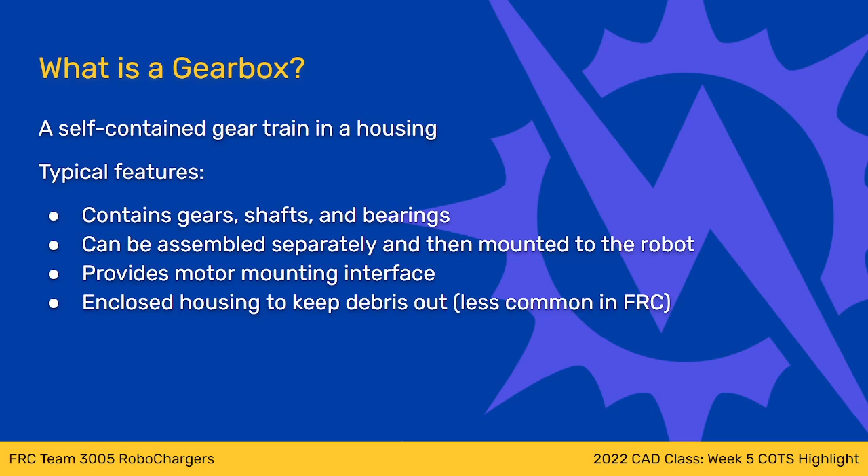So that's what a gearbox is in general. Now we're going to talk about a specific type of gearbox, called a planetary gearbox.

A planetary gearbox operates using what are called epicyclic gear trains. Hopefully I'm pronouncing that correctly - don't think I've ever said that word out loud in my entire life. Most of the time we just call it a planetary gear set or planetary gear train, but epicyclic is the technical term for it.

Basically, it is a system of spur gears - you can see this image on the right side of the screen - that are rotating inside of a ring gear, or an internal spur gear.

We talked last time about different types of gears. We talked about ring gears. We talked about spur gears.

A planetary gear set is kind of a combination of a couple different types: the internal spur gear and a normal spur gear, or external spur gear, if you like. They're arranged like this, so there are a few key components. First, the outside, the internal gear, is just called the ring gear. The sun gear is this gear here in the center, and then the planet gears are these gears around the outside.

There can be different numbers of planets. There are 4 in this screenshot that I grabbed. This is of a planetary gearbox used in FRC. I just grabbed a screenshot of a CAD model to show you what it looks like.

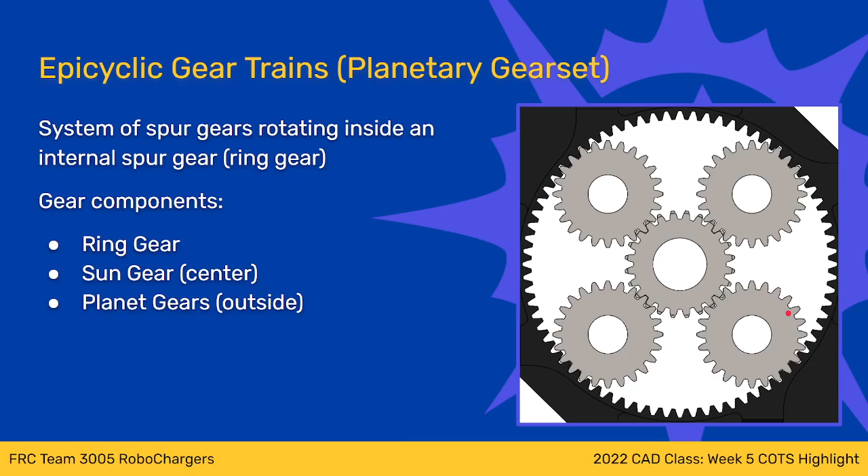As the sun gear rotates, the planets kind of roll around the outside. As the sun gear spins, the planets just migrate around in a circle, and that's why they're called planets, right? Because they kind of orbit the sun. It looks like a solar system, right? So that's why it's called that.

Okay, so let's talk a little bit more about a typical planetary gear train. Planetary gear trains, or epicyclic gear trains, are actually somewhat complicated in terms of how they can be used. There's a lot of different ways to use them.

Epicyclic gear trains can actually be used as a differential, which is a special kind of mechanical device that I don't really even want to get into. There are a lot of different ways to use them that you don't ever see inside of FRC. There's really only one arrangement that's used in FRC, so I'm going to describe that here, because that is the only way they're used in FRC, and it is the most common way they are used in general.

But there are other arrangements. So if you want to do your own looking into planetary gear sets, if you come across some weird example where it's not clear which gear is driven by the motor and which one is spinning, and you come across a different arrangement, just understand that's still probably a planetary gear set you're seeing — it's just being used differently.

So the sun gear is driven by a motor, or it's driven by a previous gear stage — I'll get to that in a second. But the sun gear is what is driven. So you've got some sort of shaft or torque transfer interface that's spinning the sun gear.

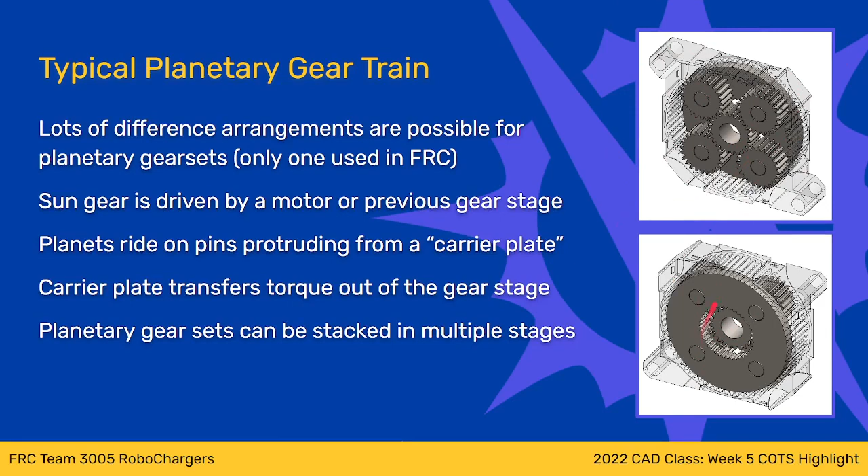The other thing is because the whole gearbox is kind of axial, I'm driving the sun gear, which is in the middle, and then I have the carrier plate. There's a spline in the carrier plate, and that's how I'm getting torque out, with something that sockets into this spline. But this carrier plate is rotating around the same axis as the sun gear. So as long as I have the proper splines and shafts to interface, I can take one planetary gear set and stack another one right on the end, have the carrier plate drive the sun gear of the next stage, and stack these reductions to create multiple stage gearboxes in this really crazy compact and easy to manage form factor.

On top of all the other advantages, the fact that you can just stack these stages end to end to end and keep going means you can create crazy high reductions if you want to, just by stacking these stages on the end. That has some very specific advantages when it comes to FRC and FTC, and I'll go into those later.

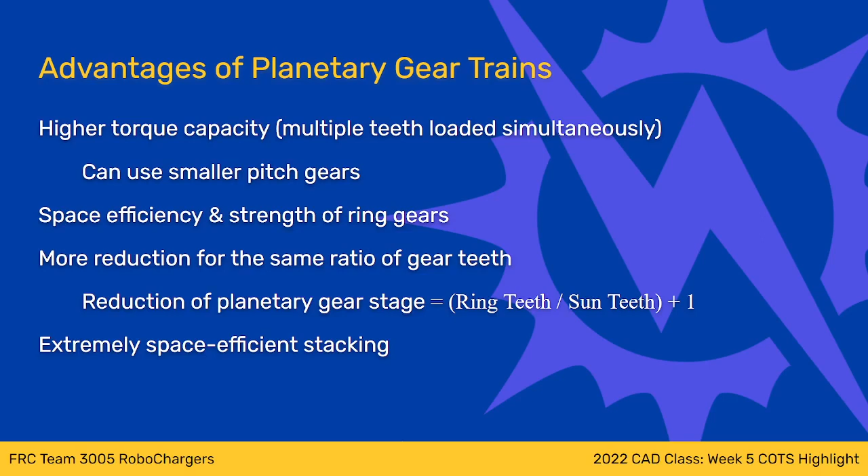Okay, so a quick summary on planetary gearboxes. They're very high performance, they're very small, and because they're small and very efficient in terms of gear strength, they're also very light. They're extremely ubiquitous inside of FRC and FTC because, in the case of FRC, weight is extremely important and space is important. FTC weight is not quite as big of a concern, but space is definitely a concern in FTC because the robot's really small.

The only disadvantage planetary gear sets have is that they are complex, which means they can be more expensive. So you're not going to see planetary gear sets on cheap items like appliances or toys or things like that, because the performance usually isn't worth the cost.

You will, however, see tons of planetary gearboxes in industrial applications. A lot of cars have planetary elements inside of the transmission, and you'll see them in robotics, obviously in FRC and FTC, but also in other robotic applications as well. So planetary gear sets just have a lot of advantages at the relatively small cost of some complexity. That's kind of an overview there.

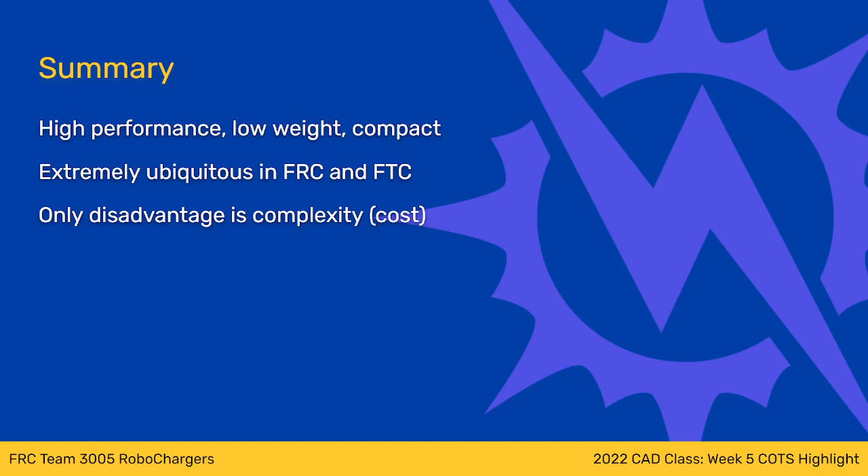Now that we've talked about planetaries conceptually, let's talk about some actual specific ones. We're talking about ones that are off the shelf, and I'm focusing on ones marketed towards FRC and FTC. Since planetary gearboxes are super ubiquitous, for a lot of applications you can go buy industrial ones, hobbyist ones, whatever - I'm not going to cover those. I'm just covering the ones targeted at FRC and FTC markets.

Okay, so let's start here. I'm going to cover some ones off the bat that are less common, and then towards the end I'll hit some of the ones that are a little bit more important for you guys to know.

There's a few different companies that make these. I know I haven't really addressed the whole supplier thing, so I'm going to throw out some names. I understand if you guys are new you might not know who these companies are, but I'll just briefly explain who they are and move on. In the previous iteration of this CAD class I had a bit more on introducing the companies we commonly buy from, but I'm just going to overview these a little bit. I also mentioned there's some regional stuff - depending if you're on the Robochargers, we use certain suppliers, and if you're watching this video from a team in a different part of the country or world, you may use stuff from a different supplier.

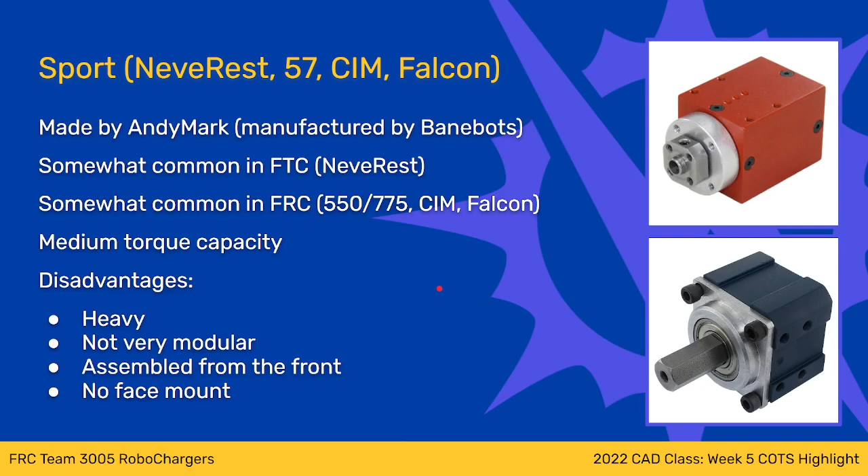This gearbox came out for the 2013 season, so it's been around for a while. BaneBots has had gearboxes around longer than that, but they've actually gone through at least one product reset where they discontinued all their gearboxes and came out with a new version. The BaneBots gearboxes that were out when the VersaPlanetary was launched were slightly different, but still kind of the same concept and a lot of the same disadvantages.

So BaneBots gearboxes were pretty common, reasonably common I would say, before the VersaPlanetary came out. And then when the VersaPlanetary came out, it just took over because it was so much of a better product that everybody switched overnight.

2013 was my junior year as a student, so I had done 2 years of FRC before the VersaPlanetary came out, and then my junior and senior year we used the VersaPlanetary, and it's just like night and day. It was so much easier to use than the products that existed before.

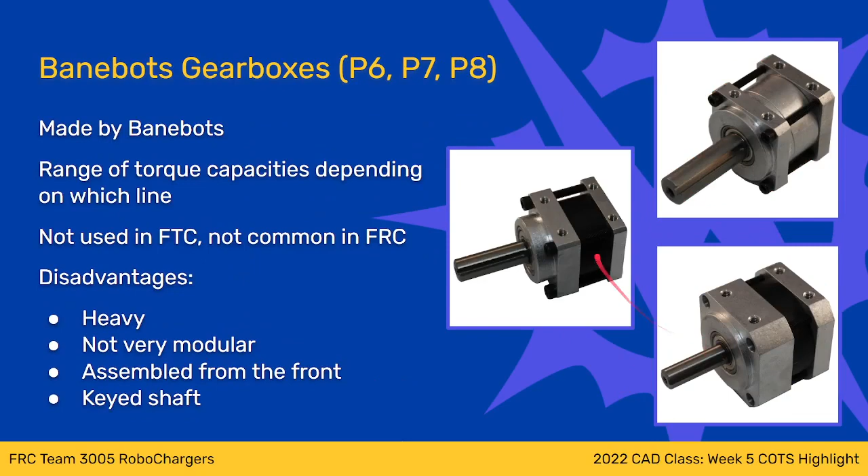So one thing I didn't mention, this gearbox does assemble from the front. That's kind of unavoidable just to keep the gearbox small and space efficient, but it does mean if you want to swap the gear ratio, you have to take the gearbox off. So that's a disadvantage of this gearbox. It does have low torque capacity, so it's only suitable for low load stuff in FRC, but it's able to handle pretty much anything you need to handle in FTC.

One of the big annoyance things about this gearbox is that it has different gear cartridges available with different ratios, just like the VersaPlanetary. However, they're not exact integer numbers. The VersaPlanetary has a 3-to-1 stage, a 4-to-1 stage, a 5-to-1 stage, etc. The UltraPlanetary's stages are nominally 3, 4, 5, but they're not actually quite the right ratio—they're an approximation, because of some of the details of the gear train inside. It's not a functional problem, it doesn't hurt performance at all. Actually part of the reason is that it improves performance, but I don't want to get into that.

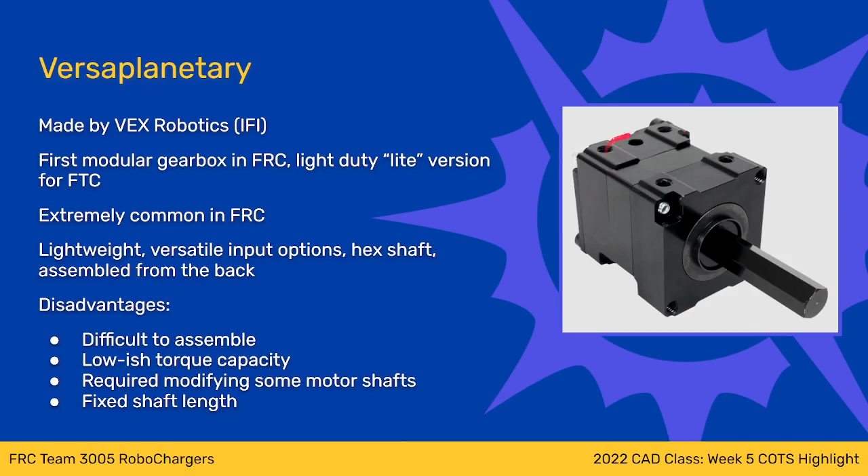Like I mentioned, it's assembled from the front. It does face mount, which is nice. The other weird thing about it is it's metric hardware, because it's used for FTC and FTC is metric primarily. But for FRC, that's a little bit weird because most FRC stuff is inch hardware, inch dimensions. Something else I should mention: the VersaPlanetary has side mounts and face mounts. The UltraPlanetary only has face mounts, so that's a bit of a limitation as well, once again because it's a super compact design—there's no space for side mounts.

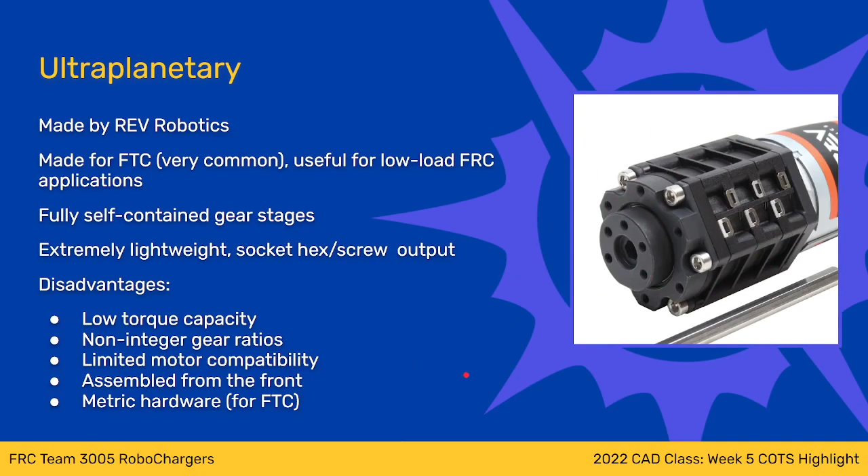Okay, so last gearbox—this one is also another Rev gearbox. This one is my baby. I actually designed this one myself. This is one of the big projects I worked on at Rev, one of the first big projects I worked on at Rev. So once again, I'm slightly biased, bear with me. This one is relatively new—it was new for the 2022 season, the season we just completed.

It is for FRC. It's pretty large if you wanted to use it in FTC—you can, but it's quite a bit larger than the UltraPlanetary. This is made specifically for Neo class motors. I mentioned on the VersaPlanetary that mounting Neo class motors, the bigger, more powerful motors we're using more commonly these days in FRC, was difficult, and also the torque capacity of the VersaPlanetary is not as favorable for those bigger motors. So the MAXPlanetary is an FRC gearbox targeted at these higher power, higher torque motors.

It is built so that you don't have to modify the motor shafts at all—you can plug the motors in right out of the box into this gearbox. The other big thing is it follows the same design philosophy as the UltraPlanetary, so you can see the same kind of clip design as on the UltraPlanetary, these shields, and the gear stages are cartridges that are completely self-contained. You can take them out of the gearbox and shake them around, wave them around, whatever, and the parts won't fall out—they're all fully contained.

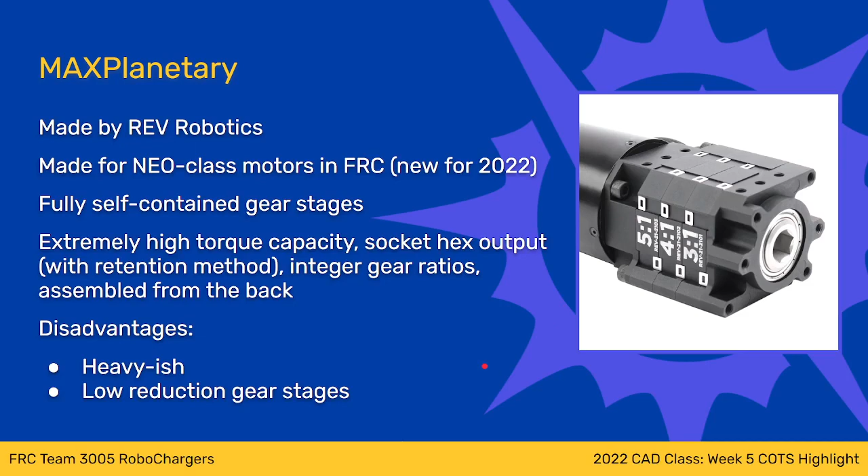All right, this presentation went super long.

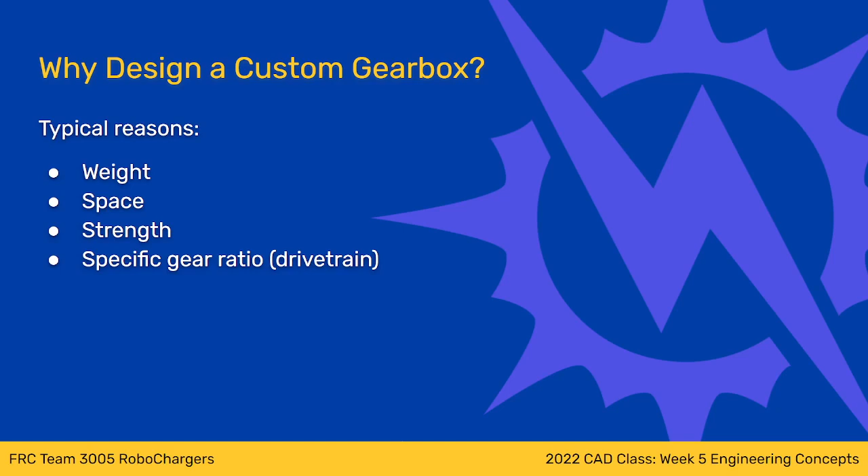The other reason to do it, also a common one, is that you need a very specific gear ratio. This is typically on your drivetrain. Elevators are also another common example, where you want to optimize a mechanism for acceleration and covering a distance in a certain amount of time. You need to optimize it based on torque versus speed, and that complicated optimization process requires a very specific gear ratio. For a planetary gearbox, all you can do is swap out a cartridge, or swap from a 3-to-1 to a 4-to-1, and that doesn't give you a ton of granularity. So a very specific gear ratio usually requires a custom spur gearbox.

Okay, so let's talk about a quick overview. What does the design process look like? First of all, you determine your specifications, like what kind of gear ratio you need, what output speed you want, what torque you want, whatever is driving the gearbox.

I'm really not going to go into that process too much, especially not this week. Determining the specifications for a gearbox is a complicated, multidisciplinary FRC, FTC kind of task. If you're first year CAD students, I'm probably just going to do that and walk you through the reasons for why the specifications are what they are, but I'll do the heavy lifting in terms of math. Once you've had a year of design under your belt, we'll walk you through the process of determining these specifications more so you can do it on your own. So I wouldn't worry too much about determining specifications in your first year of design. That's not something first year design students are going to do.

That being said, we did talk a few weeks ago about the concept of calculating torque and moments, your lever arm, how much force is applied, and how much torque you'd need to lift an arm of a certain weight. We talked about that. That's the type of stuff that goes into determining the specifications - how much torque you need to lift your robot and whatever.

Later in the CAD class, we are going to go through the common motors used in FRC and what their specifications are and how their performance is calculated. So you'll have a bit more information about how the gearbox specifications are generated from doing that module as well, but that's much later - several weeks from now.

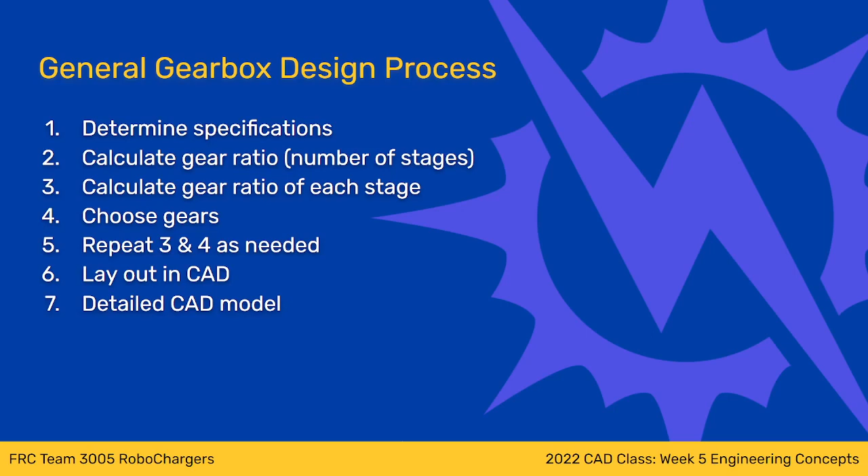Then basically you're going to lay it out in CAD to make sure that the gears all fit and everything is laid out nicely. We talk about what that means more in our actual CAD videos later. But if there's some problem in your layout in CAD, you have to go back and repick gears, recalculate gear ratios. And then once you're all good to go there, you do the rest of the CAD model, the full detailed CAD model, which is another thing we're going to cover in our CAD video later.

Okay, let's talk about, I'm just going to throw some specifications out there. I'm not really going to talk too much about it. These are somewhat random. I don't exactly know what these specifications would be used for. I just came up with some specifications that kind of made an interesting gearbox.

So we're going to be using the Neo 550. It's a small brushless motor. It's the one that steered our swerve modules and ran a bunch of rollers on our robot last year. So current RoboChargers students, you guys have seen these and played with these. New RoboChargers students, you guys will definitely come into contact with them.

So specific specifications: we need the output freeload speed of the gearbox to be 750 RPM. I'll go through the math for how we figure out gear ratio from that here in a second.

We're going to use 32 DP gears for the first stage, or 0.8 module gears for the first stage, and the second stage will be 20 DP gears. That's somewhat arbitrary. I really just kind of wanted a little bit of variety in the gears for this project, just to get you guys used to working with different hardware. In reality, RoboChargers really don't use 32 DP gears that much.

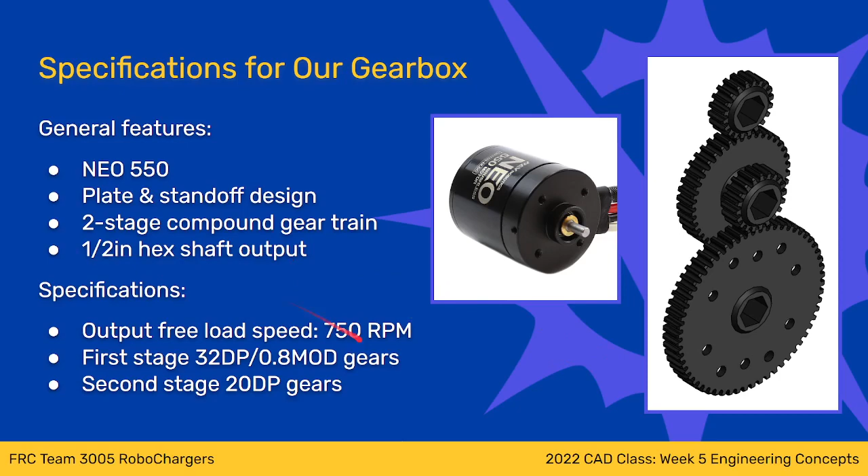Okay, so let's figure out our overall gear ratio. So we want 750 RPM on the output shaft of the gear. The other thing I mentioned, I want a 1/2-inch hex shaft output. That'll be pretty easy to achieve, but that's a thing we're gonna have. So that 1/2-inch hex output needs to be doing 750 RPM when the motor is not under load.

So the Neo 550's free load speed is 11,000 RPM. So we figure out U, the variable I'm using for gear ratio here. We figure out what the overall gear ratio of the gearbox needs to be by taking the output RPM that we want and dividing it by the input RPM. Now this is gear ratio, not gear reduction. If you don't remember my definitions for those terms, you can see the presentation from our gear segment last week. So you can see here on the screen, there's this equation.

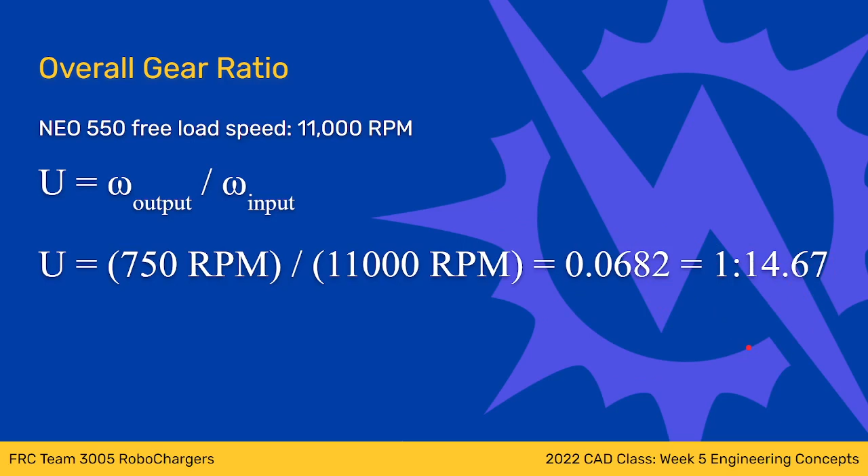We're taking 750 RPM and dividing it by 11,000 RPM. The units cancel out, and we get 0.0682, or equivalent to 1 to 14.67. So it's basically slowing the motor down by a factor of about 14.67. It's obviously a weird number, right? Not an integer gear ratio.

Okay, so let's talk about the next step. Now we know the overall gear ratio of the gearbox, we need to figure out the gear ratio of each stage, because we've got one stage here and one stage here. Once again, these aren't the exact gears we'll use - this is just a representative screenshot of what our gear train will roughly look like.

Generally speaking, you usually want each stage in a multi-stage spur gearbox to have about the same ratio. I don't want to get too into the weeds on why, but keeping all the gears the same size helps save space on the overall gear packaging. It also decreases the total rotating inertia of the system, so it takes less motor effort to spin up the gears. That effort is a small factor - just a couple percentage points in a gearbox like this. It's much more important on a drivetrain, and even then it's still a small fraction. But it's a good thing to do if you have the choice.

So generally speaking, if you have all the same gear pitch - like we're using 32 DP on the first stage and 20 DP on the second, so our gears are not the same pitch - but if they were all 20 DP gears, generally you'd want the earlier stages to have slightly less reduction or slightly smaller gears than the later stages.

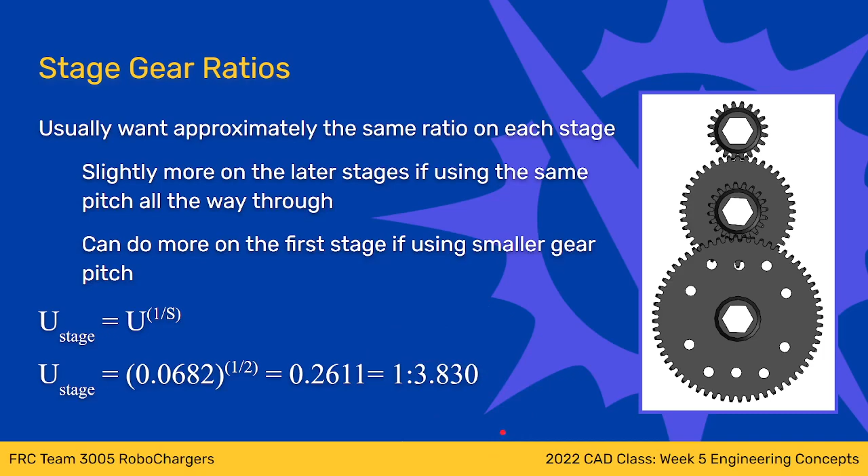Okay, so typically when you're picking out physical gears - actually picking products to buy and put in your gearbox - you typically start with the pinion, which is the small gear that goes on the motor.

The reason you do that is because typically you have less options for that product, so you're most limited by what you pick there, and you typically have more options for the other gears in the gear train.

That's somewhat unique to FRC. If you were building a gearbox for not FRC, doing custom stuff where all the gears were custom, you could do whatever you wanted. But we're talking specifically about building a gearbox for FRC.

So we need it to be 32 DP. That's somewhat arbitrary, but for this project, that's what we're doing. Basically, what you would do is look at the motor you're using, in our case the Neo 550, and check through the typical FRC suppliers - Rev, Vex, AndyMark, West Coast, and any of the others - and look at what gear options they have.

For the sake of time, I'm not going to take you guys onto the websites and look through that process. That won't be in the CAD videos this week, but in the CAD videos next week I'll go through some suppliers' websites and show you guys around. So just take my word for it - I already did the legwork and picked out this pinion. You'll see more about that process a little later next week. We're going to use one from Rev Robotics.

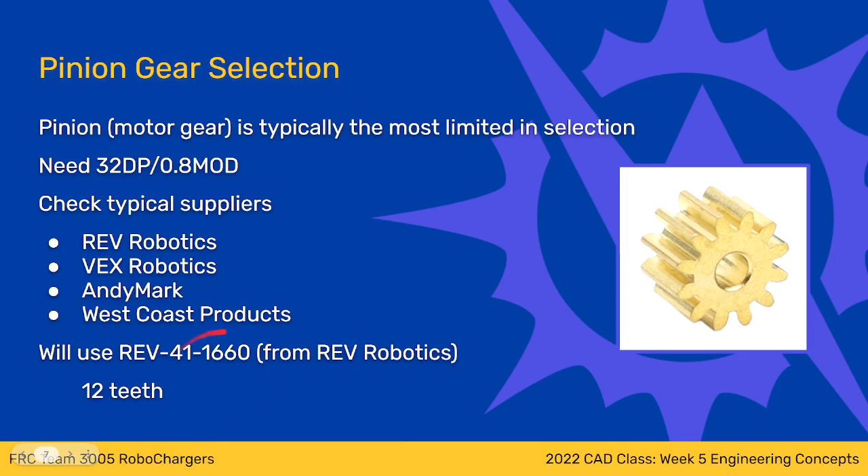Rev makes the motor, so it makes sense that we use their pinion, right? It's a 12 tooth pinion, 32 DP - actually 0.8 mod, but it'll be compatible with 32 DP gears just fine. Here's the part number, not that it's relevant, but 12 teeth is the important number.

Okay, so now that we know approximately the reduction we want our first stage to have, and we know what our pinion is, we can actually start solving some equations and finalizing more stuff on our gearbox.

Before I go on, I want to do a quick note, as quick as I can, about math in FRC and in engineering in general. Math was not my favorite subject when I was in school - in fact I kind of hated it. But as I've gotten more and more engineering experience and worked on more projects, I find myself enjoying engineering math quite a bit.

I'm about to walk through some equations - last week we had some equations, this week we have some equations, and I've kind of just made these up. These are not super standard stuff from a textbook that you have to memorize. All of this gear ratio stuff is really simple - it's just this gear's number of teeth divided by this gear's number of teeth. It's very, very simple algebra.

I can understand that looking at this in equations probably isn't very fun. So the one thing I wanted you to understand is I don't really care if you memorize these equations or even use these equations.

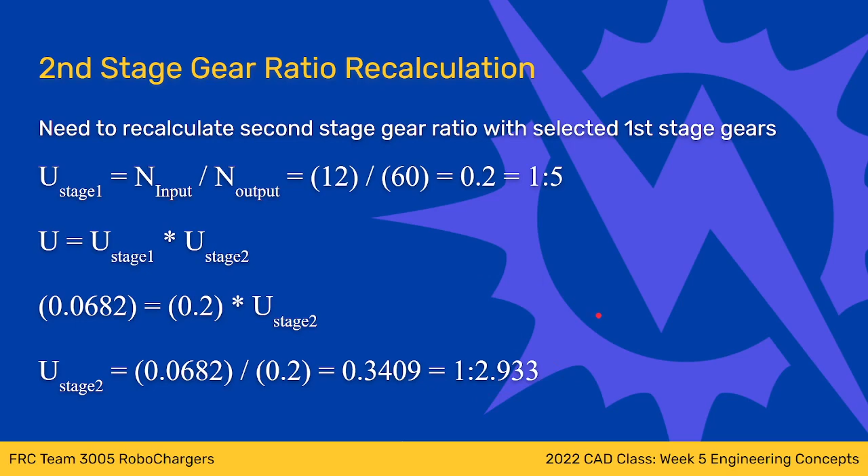Typically when picking pinions, the general rule of thumb is to go as small as possible. Because when we're talking about gear ratios, if you make your pinion bigger and you still want the same gear ratio, you end up having to make your driven gear bigger as well. So you generally want the smallest pinion possible. There are some reasons not to do that, but I'm not going to go into that now.

It doesn't matter. In our case, we're going to pick the smallest 3/8 hex bore gear we can find. It's going to be 20 DP because we specified we wanted 20 DP on the second stage. We go through all our suppliers - Rev, Vex, AndyMark, West Coast, etc. Vex has the best selection of 3/8 hex gears, so we'll use their smallest one, which is 14 teeth. They have an aluminum one and a steel one; we're going to use steel. We probably don't need steel since it's a 2-stage reduction off a Neo 550 and there's not that much torque here, but we'll use it just to add some variety to the mix. So, 14 tooth steel gear.

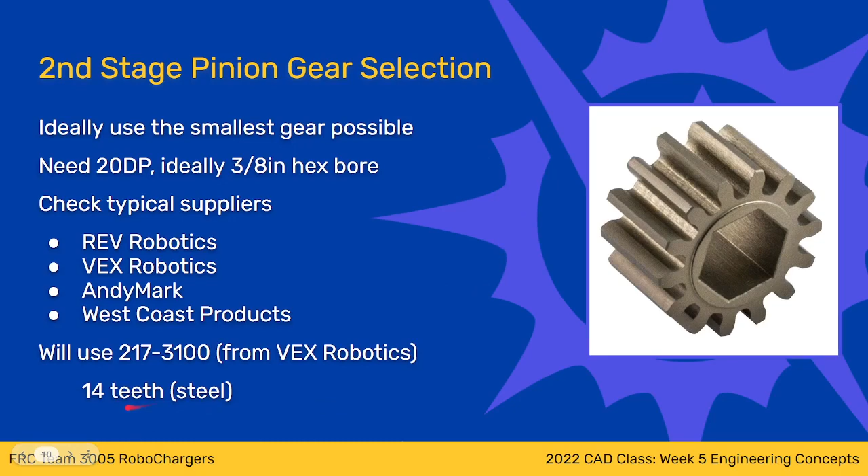So we calculated this 0.3409 gear ratio that we wanted two slides ago for the second stage, then we picked out a pinion. Now we have all the necessary information to calculate the number of teeth on the output gear. Using this same equation again, we plug in the numbers we know. We have one unknown, but it's not by itself, so we do algebra to rearrange and isolate it. We end up with 14 teeth divided by our intended gear ratio, giving a desired final gear tooth count of 41.07.

So we go on our suppliers and look for gears that are close - the closest gear below this number and the closest gear above it. Rev has 40 tooth and 50 tooth available in 1/2-inch hex and steel. Vex has 40 and 42; Vex generally has every 2 teeth available, but they only have aluminum. Since I wanted steel - our first stage gear is aluminum, so I want the second stage to be steel - we're going to go ahead and use the 40 tooth one from Rev.

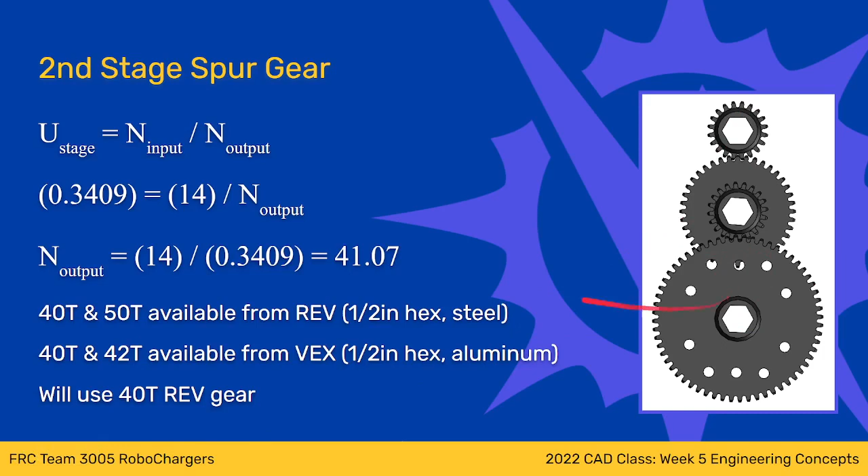And so that's our last gear. Now we've picked all of our gears. Basically what we can do is recalculate the gear reduction. So the stage 2 gear reduction, we just picked out the gears: 14 for the pinion and 40 for the driven gear.

Calculate that out. It's 0.35 as the gear ratio, which is the same as 1 to 2.857. So now that we know the gear ratio for stage 2, we take that number and the gear ratio we calculated for stage 1, plug them into this equation, and multiply them together to get the overall ratio of the gearbox, which is 0.07.

Remember, we were shooting for 0.0682, and we ended up hitting 0.07. So it's pretty close. And that comes out to be 1 to 14.29.

By the way, this decimal number is the gear ratio, and like I made a big point of calculating gear ratio every time, in reality I do not use this number. I use this number, the 14.29 — that's a significantly more useful and intuitive number to me. If this number makes more sense to you, it means that for every 14.29 rotations of the motor, the output rotates once. That's the gear reduction, effectively.

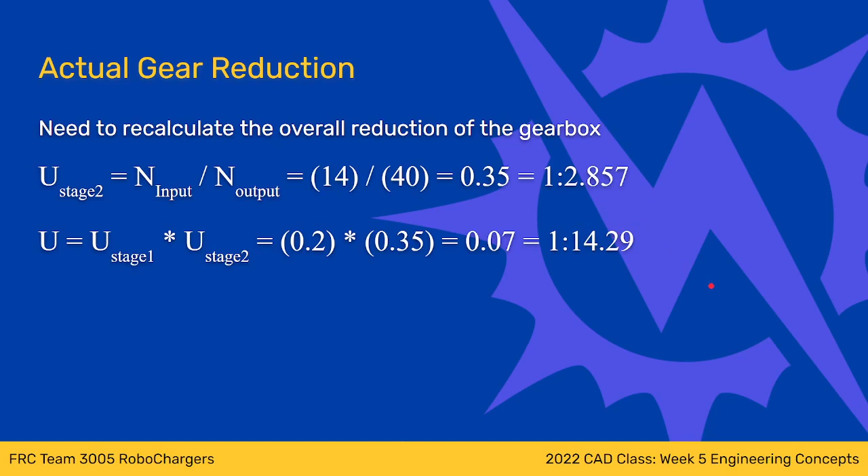Quick summary here: first stage is a 12-tooth Neo 550 pinion. Second, the driven gear is the 60-tooth 3/8 hex aluminum gear. These are all 32 DP, or 0.8 module. Second stage is a 14-tooth 3/8-inch hex steel gear. The reason this is 3/8 hex is because this second stage pinion and the driven gear from the first stage have to mount to the same shaft.

You can make adaptations to a shaft, so like one part of the shaft is 1/2-inch hex and one part is 3/8 hex or whatever — you can do that. However, it's significantly easier if you just keep the shaft the same. So both of these gears are on the same shaft, and they have the same bore, the 3/8 hex.

And then for the output, we wanted it to be 1/2-inch hex, so we used the 40-tooth 1/2-inch hex gear from Rev. So the next steps are to verify the gear clearance in CAD using a layout sketch. Go watch the CAD videos — we've got the CAD videos up. I talk about that more in the video, explain what this means, and show you in the actual CAD what it looks like.

So once we verify this, if we find any issues, we'd have to come back and redo our gear selection. Now, obviously I did the legwork ahead of time to make sure our gear selections were correct, so that I didn't lead us down a wrong path. So I'm telling you now, it's good, it's fine — you'll see in the CAD video everything clears. However, if you didn't know that ahead of time, you'd have to check it in CAD and potentially come back here and select different gears. Once you've verified that it's good, you just model the gearbox, which is also covered in the CAD videos between this week and next.

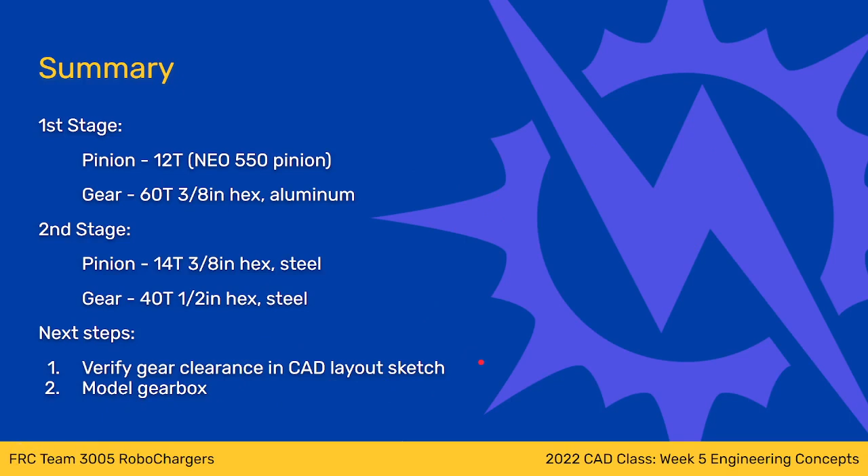Okay, once again sorry I ran over — lot to cover this week.